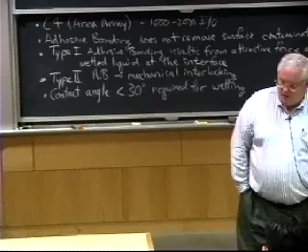Last time we finished up on electronic materials, or chip attachment, and I talked about controlled collapse chip connection, which is called C4, or sometimes called area array. Because you're doing area bonding rather than perimeter bonding, you can in principle get up to 1,000 to 2,000 input-output leads. In fact, you don't really get that many.

Because you can't use the whole surface area of the chip. Even though it's only a square centimeter or so, it turns out because of the thermal expansion differences, you have a hard time using all of the ones on the outer edges because there's too much shear going on. Plus, over the last few years, as we've gotten more and more transistors on a chip, we've kind of broken down Rent's rule, and we don't have to get 1,000 to 2,000 IOs.

Some people would still like to for certain types of chips, but in most cases we're putting lots of chips on a single chip because we can get so many transistors on a chip. So we've kind of started to limit out around 400 IO for common things.

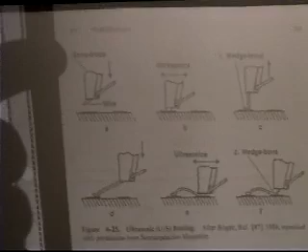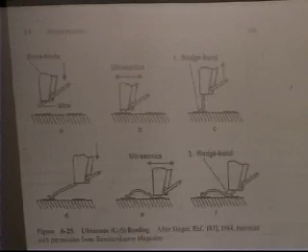I also found some of my overheads where we talked about wire bonding, kind of a little sewing machine needle. You've got this little head, which they call a sonotrode, for ultrasonic wire bonding, because of the ultrasonic vibration to help the wire bonding. It's basically a little metallic needle, if you will, with the wire fed through it, and it comes down. You apply ultrasonics, and you end up making a wire bond on a pad here, then it comes over and makes another one.

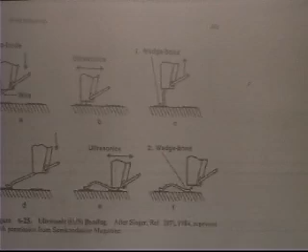You've got a handout with these things in them on chip to package interconnection, so far as that goes. These come out of this handout on chip to package interconnection.

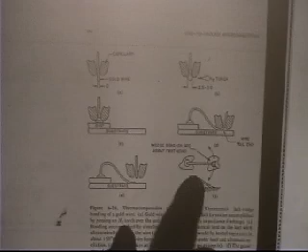You make your bond, then make the bond here, and then come over and make another bond on the other side. So you get these little loops of wire, whether you're using ultrasonic wire bonding or thermocompression bonding.

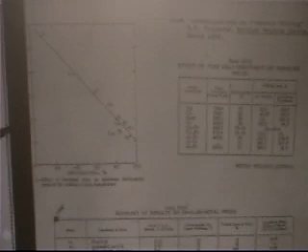Another example - I had put up on the board this graph, which shows the oxide to metal hardness ratio, for indium, aluminum, and tin, versus the percent deformation. You also have this handout so far as that goes.

I mentioned that aluminum was essentially the second easiest material to cold weld because it has such a high hardness ratio to its metal oxide, and pure aluminum is relatively soft. Because of that, when you squeeze and get some interfacial sliding, the aluminum oxide doesn't smear like peanut butter across the surface and recontaminate it. It stays there as hard lumps.

Well, it turns out people actually weld aluminum wire together in the aluminum wire drawing business. This comes out of the welding handbook - I think you've got a copy, but it doesn't really matter. You can't just push two wires together to bond them because you don't have any interfacial sliding.

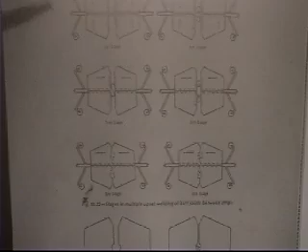So what they actually do is have some dies that hold the wire, kink it sideways, and squeeze it once, so you're getting interfacial sliding because the two are at kind of a funny angle. You squeeze them together, getting interfacial sliding, then do it several times to get more and more sliding, and you can essentially make near perfect welds in aluminum wires by cold welding.

We can't do that with iron or copper because we just can't get enough deformation in wires when you have small little ends like that, right? But with aluminum or indium, you could do it. So these things actually do work in certain cases.

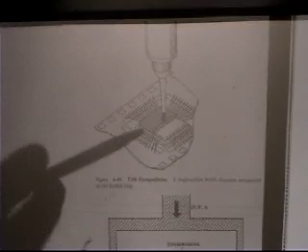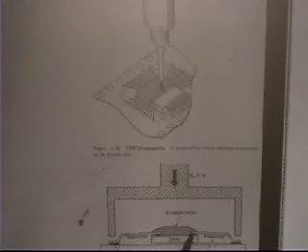Now, the last overhead I found is this one - this is basically chip on board. Those tab pieces I handed out, this is the tab tape. They might encapsulate it in some polymer to protect the chip. The inner lead bonds have already been made, and then you come out to the outer lead bonds - this tungsten or molybdenum hot bonder comes down and makes the solder joint, squeezing these things together. That, I believe, is in the chip-to-package interconnection handout.

So that finishes up, since I finally found where my old overheads were of some of these pictures. The next thing...

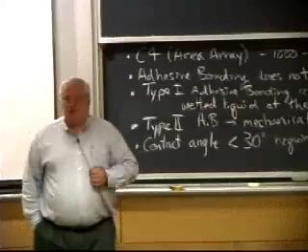We went to adhesive bonding, and I pointed out that adhesive bonding is unique among all the joining processes because it doesn't really remove the surface contamination. You still have the water vapor, you still have the oxides on the surface. What you're going to do is interpose a liquid on that rough surface that wets the surface, which will essentially lower the interfacial energy.

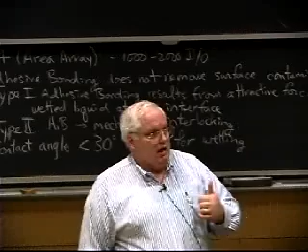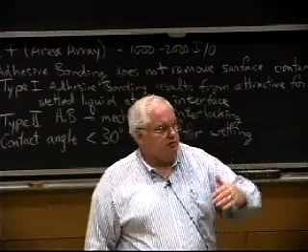Because of that, adhesive bonding is inherently Van der Waals type bonding. There are no primary bonds in adhesive bonding, so it's always a weaker type of bond. If you can get primary bonding, you have theoretically 2 million, but in practice you'll get 50 or 100,000 if you get primary bonding with no residual stresses to weaken it. If you only get Van der Waals bonding, you're lucky to get more than 5,000 or 10,000 psi in bonded strength, because you'll still have defects at the interface.

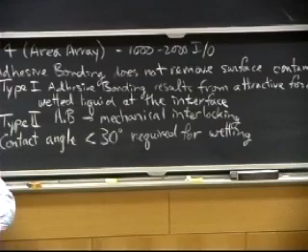So adhesive bonding, by its very nature, doesn't remove the surface contamination. That means it's Van der Waals, which means it's always going to be relatively low strength. People that claim they're going to get 50,000 psi out of adhesive bonding are just dreaming - they're fighting fundamental chemical bonding strengths.

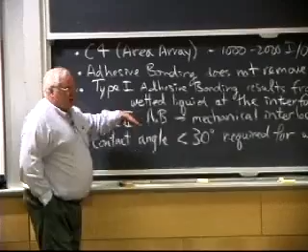However, we talked about two different types of adhesive bonding. Type 1 adhesive bonding results from the attractive force of a wetted liquid against the interface. I passed around the Johansson blocks, and you could see how just a little bit of liquid will bond things. If you've ever had a drop of water on a table and put a piece of plastic on it, you can actually feel the adhesion of that little piece of plastic held there by the water.

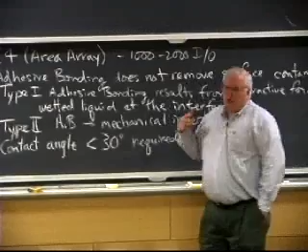Now, there are some particular applications - but let me go first to type 2 bonding. Type 2 adhesive bonding is basically mechanical interlocking, and it's the one we use most often in adhesive bonding.

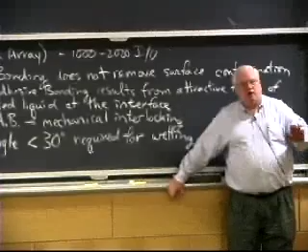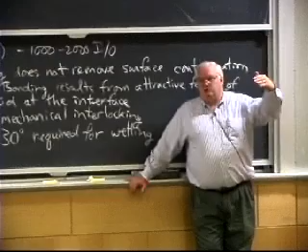One example of something that's fairly pure type 1 adhesive bonding is the adhesive you use to put the rear view mirror on the windshield glass of your car. That glass has a very smooth surface - no roughness there. In fact, if you put roughness in the glass, you'd be introducing a potential crack starter. So they use an adhesive there that is primarily type 1 adhesive bonding, and we'll talk about how you get it to be stronger than just a liquid in a bit.

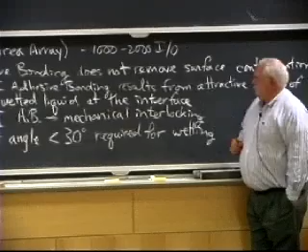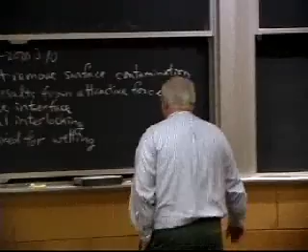We talked about wetting angles, contact angles, and Young's equation. I didn't tell you at the time, but in general, some books will say if something's less than 90 degrees, it's wetting, and if it's greater than 90 degrees contact angle, it's non-wetting. So basically what these pure scientist books say, from a theoretical point of view, is that this is wetting, this is intermediate, and that's non-wetting.

Well, it turns out, unless this angle is less than 30 degrees - not just geometrically, to some scientist who's never made a joint in his life - you could never make a weld or an adhesive bond with something that has a 90-degree contact angle. It's going to beat up on you; the adhesive won't flow. In fact, even at 30 degrees it's pretty marginal. Usually you want something less than 10 degrees contact angle.

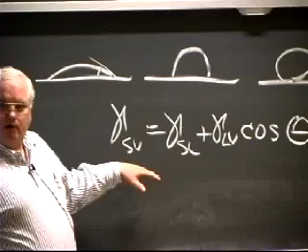And if you go back to Young's equation, which is: gamma solid-vapor equals gamma solid-liquid plus gamma liquid-vapor times cosine of theta. If this has to be less than 30 degrees, it puts some constraints on what these other three things are, certainly the ratios of these three. So it's nice to have a high value of solid-vapor energy in order to get a low value of this contact angle.

That's why metals are the easiest things to wet in general. Now, we're talking about adhesive bonding. The metal is not necessarily the surface that's being bonded to, because it's usually already contaminated with oxides. But when we use Young's equation, when we get to soldering and clean off the oxide, or brazing, it turns out metals can produce the strongest solder, adhesive, or braze joints, because you do get rid of the oxide. In fact, when I'm doing adhesive bonding, I never really adhesive bond directly to the metal.

There's always some interlaying oxide, so I'm usually adhesively bonding to some sort of ceramic. It's going to be covalently or ionically bonded. In most cases, adhesive bonding is also this type 1 or type 2 mechanical interlocking.

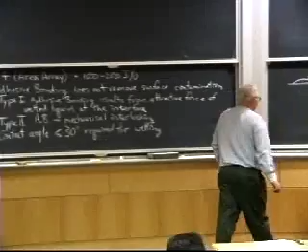We do a number of things to try to convert the surface to a very rough surface, and there's two reasons for doing that. One is rough surfaces wet more readily.

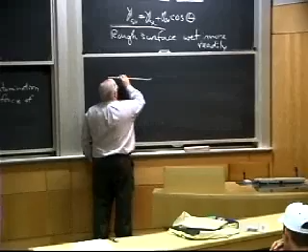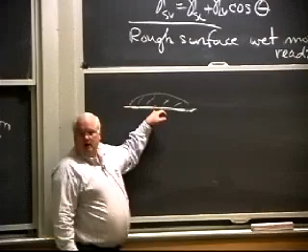The reason for that is relatively simple. If I had an atomically smooth surface and put some liquid on it, the amount of high energy surface that I've reduced the energy of by creating interfacial bonds with lower interfacial energy than the original surface energy is equal to this area. If I have a rough surface with the same width, the actual surface area that I've reduced the surface energy of by interposing this liquid which wets the surface is much greater. So from an energetics point of view, I've reduced the energy of the interface more here than here, because I've got more real surface area.

It turns out this is true sometimes in adhesive bonding, but in soldering more often than not. If you have some solder that doesn't want to go with the right flux, if you sand the surface and roughen it up, you may find it flows very well. Or alternatively, you can sand it in one direction, put your solder drop on it symmetrically, and you'll find it flows preferentially in the longitudinal sanding direction, because of this surface roughness argument. If you can quantify it, you've got a handout that goes through the math to quantify that extra reduction in surface energy by interposing this liquid.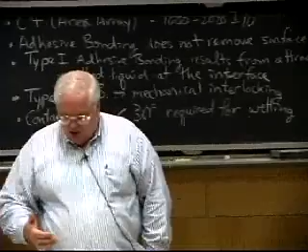But in order to roughen up the surfaces, I already mentioned my oldest son's Eagle Scout project, where we had galvanized steel where the paint was peeling because they hadn't put on a primer. To really do it right, I forced my son to research it, and we found that if you put acetic acid on the bare galvanized steel, you actually form a zinc acetate on the surface.

Now, you're not always painting galvanized steel, but more commonly you might be painting iron, in which case you phosphate the surface. Or you might be painting iron or stainless steel where you chromate the surface, or aluminum where you anodize the surface. And when you anodize the surface, you're growing an oxide.

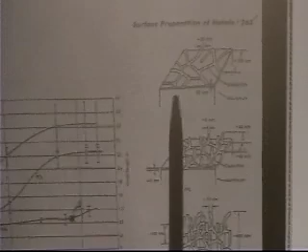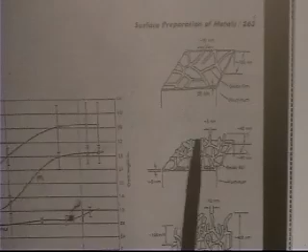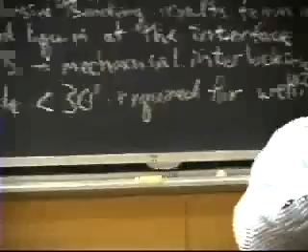It turns out when you look at the surface of how the aluminum oxide grows, it actually grows in little cells on the surface. As you get a thicker and thicker anodized layer, these little columns of aluminum oxide grow, and you get kind of a honeycomb type of structure with all these little fingers sticking out. It has a very, very high surface area. It's very porous, and it makes a great mechanical interlocking surface.

You've got the aluminum oxide bonded chemically directly to the aluminum, and now you put your adhesive on there, and it sticks because the adhesive hopefully has a wetting angle that allows it to go down into those pores, and you just can't get the thing off. That's exactly what happened with the zinc acetate on my son's Eagle Scout project. When they painted it, you can't get that paint off. You're going to be scraping metal before you get paint off.

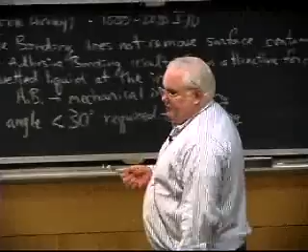Nowadays you phosphate steel. In fact, people learned just after World War II that you can apply a phosphate coating to steel, and all you have to do basically is stick it in Coca-Cola, or Pepsi-Cola, because they're basically just phosphoric acid. So you stick it in there, and you'll get a rough surface that grows on the iron, and that will help paint or some other coating adhere to it by mechanical interlocking. You have to make sure there's no rust or oxide on it. It should be clean, because you're actually making an iron phosphate on the surface.

If you already have iron oxide on the surface, the iron phosphate won't form in preference to iron oxide. So you have to basically clean it and stick it in the acid. It's got to be a relatively clean steel surface. You can't just put it over a heavily contaminated, rusted surface.

You can put chromates on, and you can put chromates on aluminum surfaces too. The problem with chromates is basically environmental, because you're doing it in a chromic acid bath, which is a carcinogen. It's the same type of thing we talked about with plating of bumpers. But people still use chromate conversion coatings. They were spec'd many years ago, have excellent corrosion resistance, and also help with paint adhesion, or other adhesives.

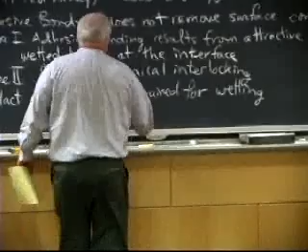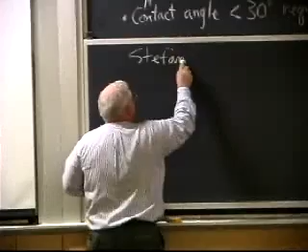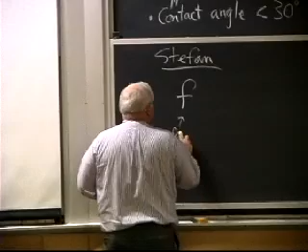So basically, what Stefan was - let's say I had a liquid between 2 solid plates, and I'm going to squeeze the plates together to flatten that liquid between the 2 plates. It's a viscous liquid, and eta is the viscosity.

H initial is the separation between the plates initially, and H final is the final separation. If it's a circular disc, that's the radius.

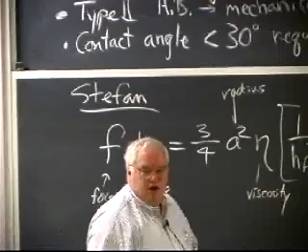That's the Stefan equation. What he solved a number of years ago was, what's the time it takes to squeeze a liquid between 2 plates? If you want the derivation of it, you can go to a book, although you can probably only find this in the MIT library.

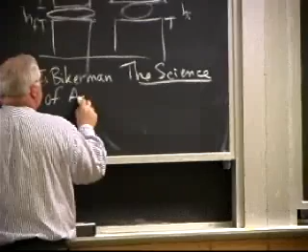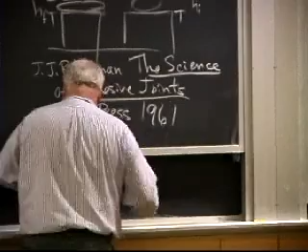J.J. Bickerman, of adhesives. Bickerman was actually a professor of civil engineering here at MIT, and he wrote a book on it. I guess he had to worry about how to glue houses together or something.

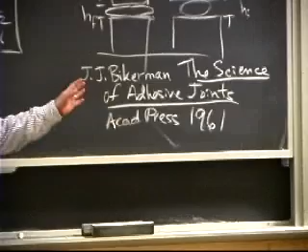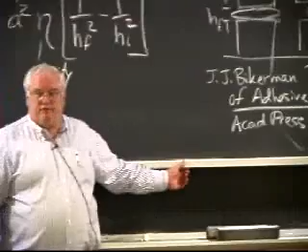None of the modern books on adhesives go through this. Now, I found some people at Sandia Labs in the last 5 years who have rediscovered the Stefan equation and how it applies to adhesive joints. But for something like 20 or 30 years, it seems like people forgot about this and were throwing it away.

You got a bunch of physicists who were told by some manager, you're supposed to work on adhesives, and they went off and worked from a fundamental level, worrying about the gluons holding the quarks together and things like that, for whatever that's worth, which is essentially nothing.

...water. 10 is more like syrup, as far as that goes. If I've got a diameter of one that's 10 centimeters, or one that's 10...

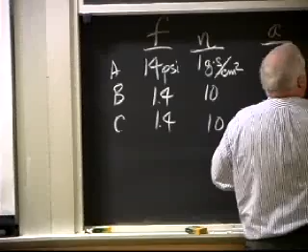I have H2, which is H final - 0.01 centimeters. 0.01 centimeters is 4/10 of a thousandth, about a half thousandth of an inch. Or 0.001, you're getting down to a few tenths of millionths of an inch - a really good fine surface finish.

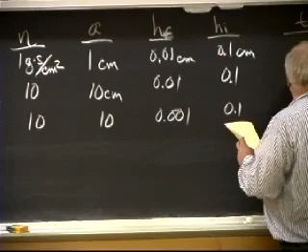And I'm going to start each one at a tenth of a centimeter, and I want to know how long it takes to squeeze that liquid together. It takes 7.5 milliseconds in the first case, 75 seconds in the second case, and 7,500 seconds in the third case.

You can figure this out - I'm plugging these numbers into the Stefan equation to give you some examples. So with atmospheric pressure, water as the liquid, a little disc 2 centimeters in diameter, and something like half a thousandth final separation.

Not all my surfaces are that fine. I can do this in 7.5 milliseconds. If the size - I square this - things go up by a factor of 100.

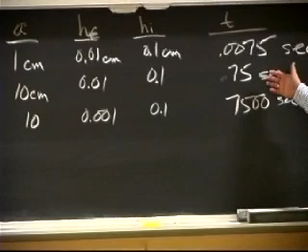If I drop the pressure, the time goes up by another factor of 10. And then what else did I do? I changed the viscosity, so I got 10 to the 4th, okay? But this is basically just something that's kind of like syrup.

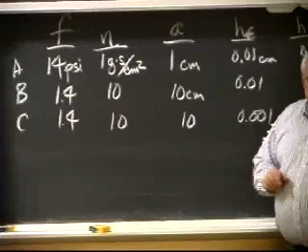So yeah, this is a little bit bigger area, the pressure's down to a fairly low pressure - it could take a long time. This last one, I just made things even thinner here, and since that goes as the square, you get to ridiculous times to make the bond.

Now, why should you have to worry about trying to make bonds in 7.5 milliseconds? If you went to the store and you were thirsty - your orange juice containers have labels on them, right, but those aren't adhesively bonded. But if you take a beer bottle, or a relish jar, or a mayonnaise jar, they've adhesively bonded a label on there.

And when they're filling these things, anybody have an idea how fast they fill beer bottles or soda bottles? 24 a second - a case a second. Basically they have this big lazy Susan table, about 10 feet in diameter, and the bottles come feeding in and get filled as they go around the table, but they're coming out at 24 a second. They're actually in there for a couple of seconds because you can fill a couple of cases around the circle, but the machine squirts it in.

In that process, they also have to slap the label on. So you've got to be able to slap the label on and have it bond within a fraction of a second - maybe not 7.5 milliseconds, but you've got to have an adhesive that doesn't take long to stick and form. You can't just, if it's a viscous liquid, then you've got to form a thin joint.

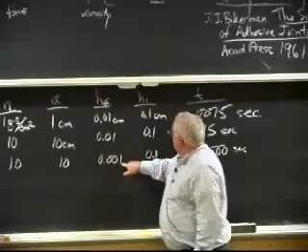What does the Stefan equation tell me? It tells me that as the joint gets thinner and thinner, the bond, or the force-time product to squeeze this together, is going to get longer.

The interesting thing is the Stefan equation also works in reverse. If I went back to the differential equation that solved to get that equation, and I start out with this as the initial and this as the final, I will get the exact same equation. It's just reversed.

So now I can say, if I have a viscous liquid between two plates, I want to know how long that joint will last, because the viscous liquid has got to flow. If they're already wetted, there's going to be a certain time, depending on the force I apply, for how long it will take to separate.

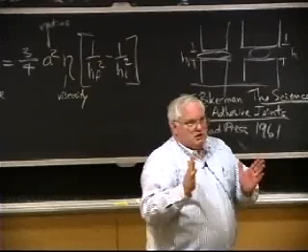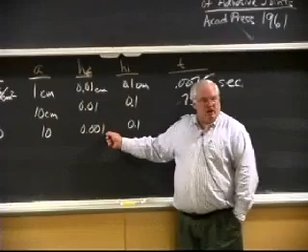Well, if I go back to this, and I had something with a viscosity similar to water, or maybe my Johansson blocks had a little grease on them so the viscosity is a little higher, and I slide them together and make them really thin, and I have some force which maybe isn't much more than about 1.4 psi, the Johansson blocks might hold together for 7,500 seconds. In fact, if I had stood there and held those Johansson blocks, sometime in the next hour or two they probably would have fallen apart.

Because it's just a viscous liquid that's holding them together, and the viscous liquid will flow with time. So you can look and see what the parameters are.

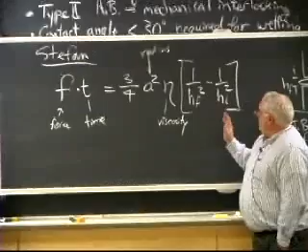If I want to have a good adhesive strength that lasts for a long time, this product has got to be large. And one of the secrets in adhesive bonding is to start out with something that you can form very quickly, like slapping a label on a beer bottle, and have it change some way such that it lasts for a long time.

And what do you change? You change the viscosity, right? If you look at it, you can't change the area of the bond.

You can try to make a thinner and thinner bond, and in fact you've experienced that, because if someone puts something up on the wall with Scotch tape or something else, and you come back 5 minutes later and it falls down because the adhesive wasn't very good, what do you do to try to make it stay up longer and harder the next time? You go and push on it real hard.

All you're doing is increasing the force to try to increase the force-time product, to get this thing smaller so it stays up longer.

But still, all you're doing is type 1 adhesive bonding with a viscous liquid in between. The problem is every time it falls down and you put it back up, you're picking up more contamination, so the actual bonding strength gets worse and worse each time. But you're basically just squeezing harder and harder.

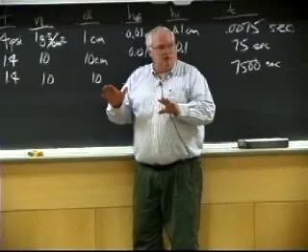When I'm bonding beer bottles, I'd better have a very, very low viscosity adhesive, or I'm not going to have time to slap that label on there. However, once the label's on there, I want to change this to a very large value.

And in fact, how much does viscosity vary in the world? Anybody have any idea? I mean, viscosity is measured as a shear, right?

I apply a force to something, and over time it creeps. So you apply a shear stress, and the viscosity is the proportionality between the shear stress and the displacement versus time. So it slides, viscous, right? It moves with time. So it's dx/dt, how fast it moves, some velocity. I apply some shear stress and I get some velocity, and the proportionality is viscosity.

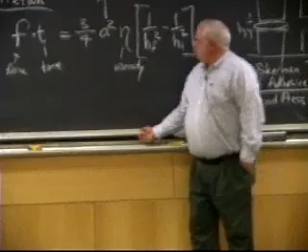Well, it turns out the viscosity of a gas is something on the order of 10 to the minus 3 gram centimeters per second per centimeter squared. Viscosity of water is about 1,000 times greater.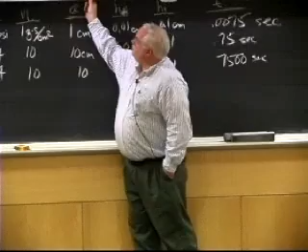Yep, the units of force here should be in PSI, I think. Did they not work out? Right, this is just force over area.

Well, you can, except you just bring the a-squared over there. I'm just writing it down like Bikerman and everybody else does. So force over a-squared is pressure that I apply. I think it's been a while since I worked this out, but you have a homework problem and the students haven't complained too much about getting the units to work out.

But if I have a larger area, then it takes a greater force to break it. So I'm just talking in PSI to break the force per unit area. Okay, so I want to change the viscosity. The viscosity of a gas - gases are not very good adhesives, they're pretty good lubricants, like a gas bearing. But water's about 1.

Molasses might be 100 or 1,000. A solid is something on the order of 10 to the 10th - might be 10 to the 8th, might be 10 to the 14th. Some solids are harder than others in terms of their ability to resist force over time, or creep. Lead is a much lower viscosity than steel, which is lower than tungsten, which is lower than diamond.

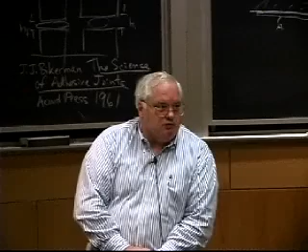And the last one, I can basically do a chemical reaction. I can take epoxy, take these 2 things, and they have a chemical reaction, and they solidify because of the chemical reaction. So those are the 3 basic ways, and we'll go over those and talk about different examples.

As your homework for the weekend, think of any adhesive - whether you're making a ham and cheese sandwich and putting some mustard on it and looking at the bottle, something's adhesively bonded there. You're going to see all kinds of things that are adhesively bonded. If you have an asphalt driveway, it's adhesively bonded rock - how did they bond it? If you've got bricks in your house, it's mortar - how did the mortar go from being a soft, quote-unquote liquid that you could deform and get into the pores of the brick, and then harden up? So over the weekend, think of anything you see that's adhesively bonded, and ask: did I solidify it, did I react it, or did I take away a second component - did I do solvent removal to get it to harden up?